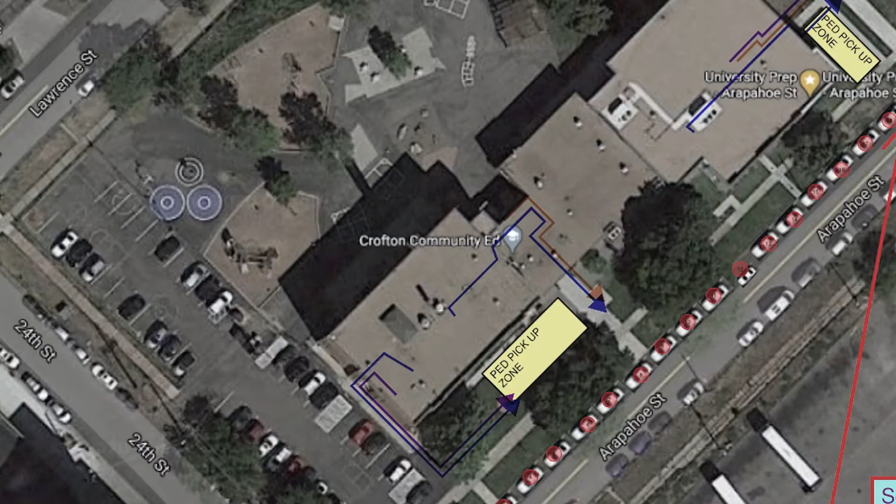I, along with my colleagues John and Adam, participated in an Autodesk four-part webinar series designed for safety following COVID-19. Session 3, Analysis Focus. In this video, we will cover how we became involved with a local school in trying to help them reopen, what kind of data they typically have available for us to use, what tools we use to evaluate classroom capacity and COVID-19 safe routing, and how we analyzed our design results with Autodesk Infraworks Mobility Simulations. Enjoy.

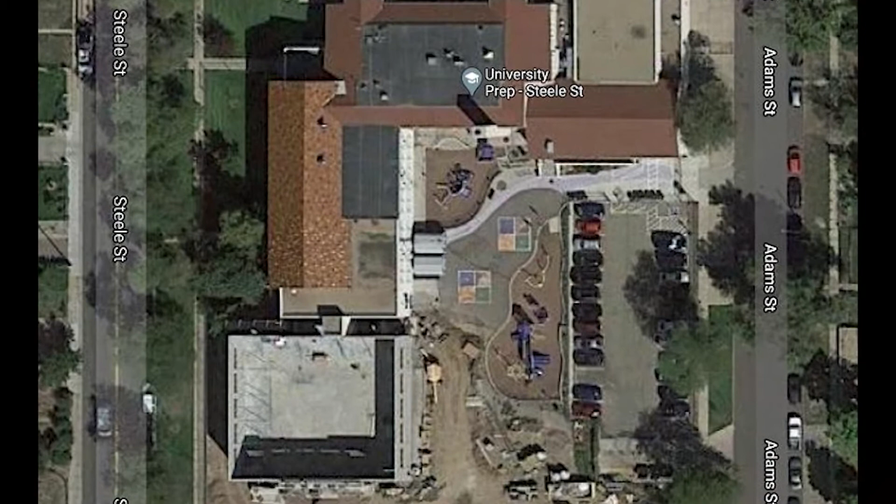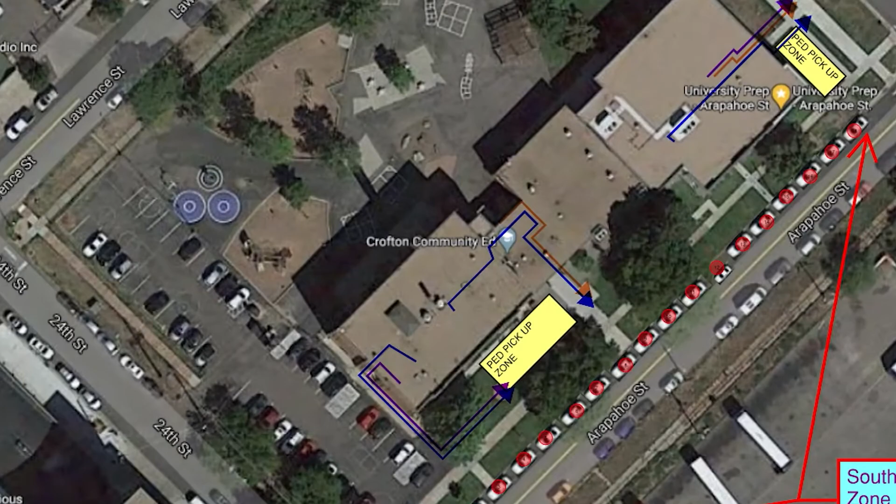VAplus got involved with UPrep out of need, based upon the fact that I'm a parent of a scholar at this elementary school. I quickly recognized that if we eventually went to in-person learning with COVID, social distancing and all the other things in the news being handled, it was going to make dismissals very difficult and seemed like it was going to be a logistic nightmare. So I reached out while getting supplies for virtual online learning for my son.

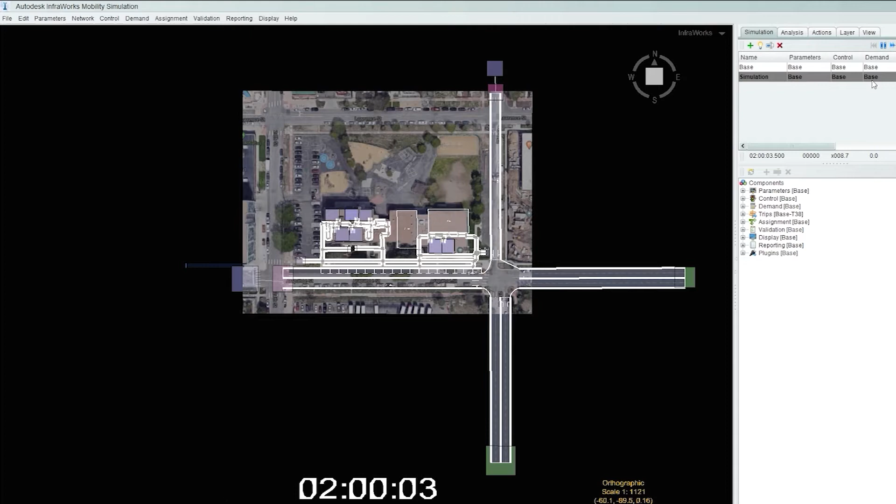I reached out to Alistair, the chief operating officer at UPrep, and requested a meeting with him to go through some of the stuff we thought we'd be able to do. We had just been introduced to InfraWorks and Mobility Simulation, and it felt like it would be a great way to take some of our other COVID social distancing tools that we had developed and prove and demonstrate that the solutions were workable, and fine-tune stuff without experimenting on students.

We quickly ran into some interesting challenges to overcome. A few of them being that there were a bunch of different transportation modes to take on. They have buses with a very limited window. They had pedestrian pickups, and they also had car pickups. And at the Steele Street campus, they had an additional one beyond the Arapahoe campus. They have students that are released and just walk home. So we've got a bunch of different modes to take care of.

They also have limited staff to watch kids in class as well as watch for parents coming up to pick up their kids, so they have to walkie-talkie communicate back and forth. They couldn't have too many points of entry or dismissal because they wouldn't have enough staff to cover that. And also just being able to maintain cohort separations. In Colorado, they're doing cohorts where in elementary schools, they're essentially not mixing these small groups of students to be able to contain outbreaks and things like that.

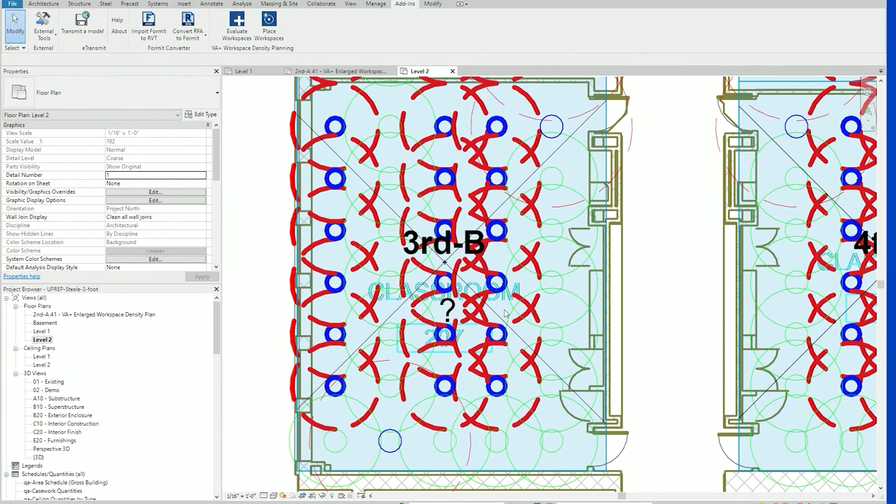So those were all things we started to deal with and started to use the mobility simulations to prove what we had essentially done—taken PDFs and CAD files, since each campus had a different piece of that, and put them into Revit, used our COVID planning tool to do some spacing. In one case we did a manual operation where we were able to pull in and lay out some classrooms. We've also taken advantage of generative design tools to give them more options, understanding where the display or chalkboard wall is versus student circulation and teacher circulation amongst all that as well.

The response has been pretty amazing as far as them being able to see how things are working. I think it gives them quite a bit more confidence that they can focus on the little details to make sure this is implemented safely, and see problems they probably wouldn't be able to see if I just showed them sketches or plans of the routing and things like that. Being able to show, hey, here's how you need to lay out your classroom is quite helpful, and also how you need to operate your one-way routing to keep cohorts from mixing.

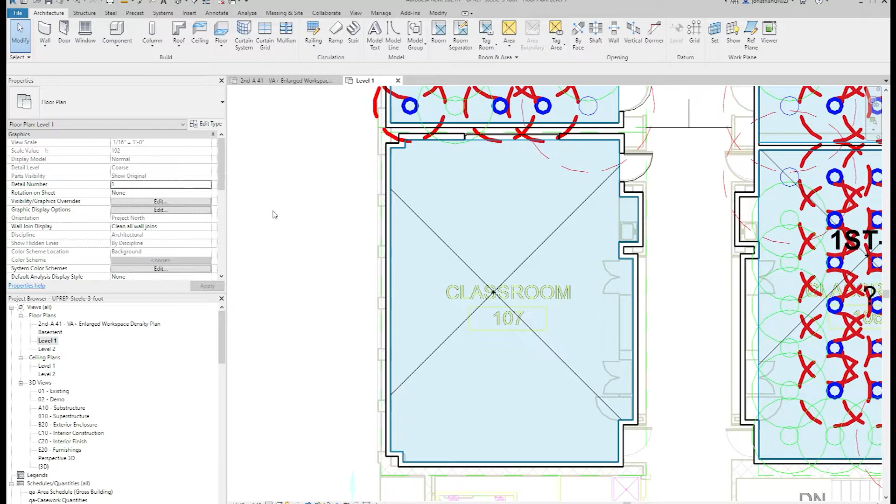Our workflow utilizes the generative design tool in Revit to create new classroom layouts. For this classroom, we will be generating a layout of student desks using a modification of the workspace layout script that comes with Revit's generative design tool. This allows us to explore configurations and find the upper limit of how many student desks can exist in the room while complying with social distancing guidelines.

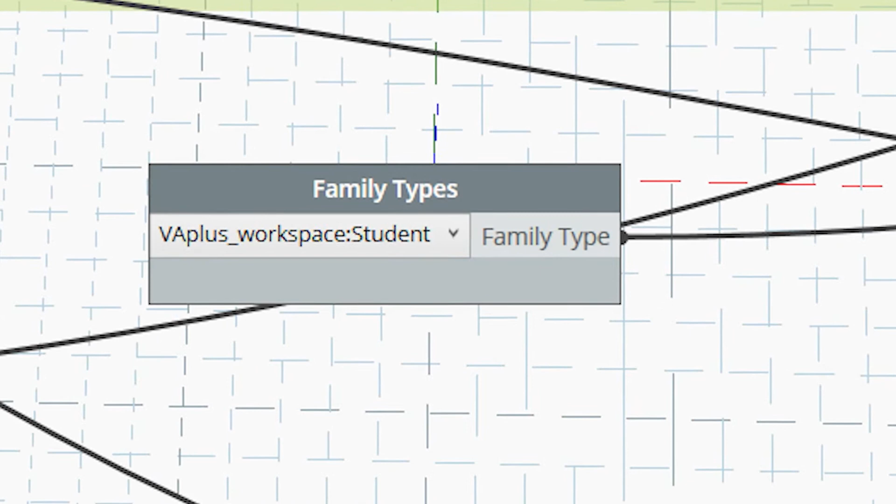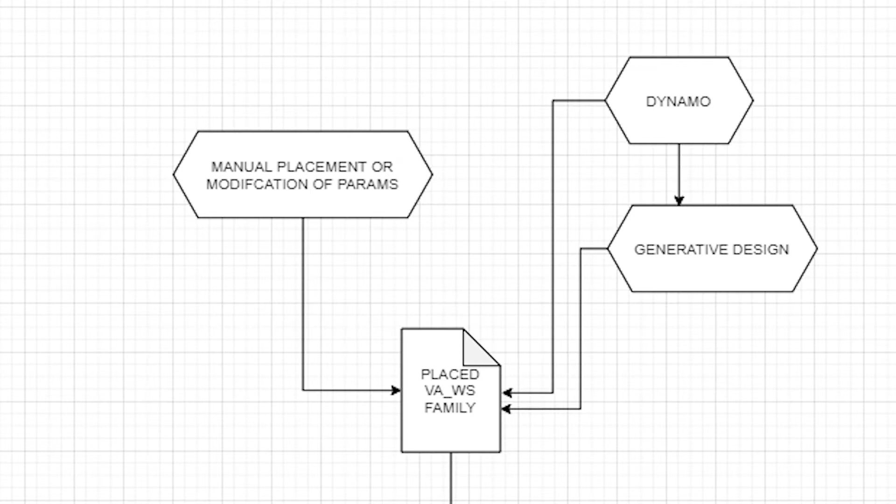We have modified the generative design script to also place our workspace family in addition to station furniture. These workspace families represent an occupancy point, common across our workflow, which allows both generative and manual placement to have identically accessible, machine-readable results that are managed and reportable through our Workspace Density Planning Tool add-in. This also makes the data available for tools outside of Revit in the form of plain text files. In this project's case, the guidelines specify a radius of 3 feet for students and 6 feet for instructors.

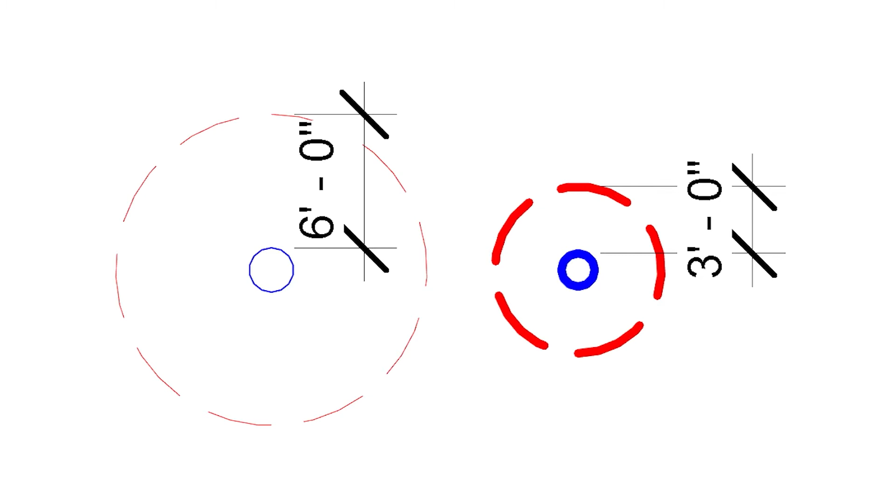The social radius and inner human radius of workspace families can be adjusted in the family type, and multiple types can be used to represent different kinds of occupant stations, or to represent circulation nodes.

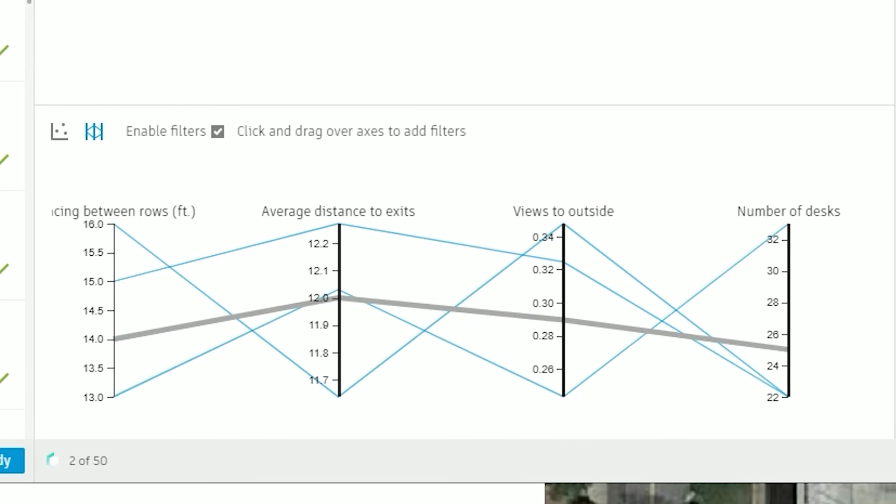Next, we generate layouts in the Revit Generative Design tool. Then select a desirable layout, and Generative Design places our workspace families in the model. A 6-foot radius workspace type is also manually placed to represent the occupancy point for the instructor.

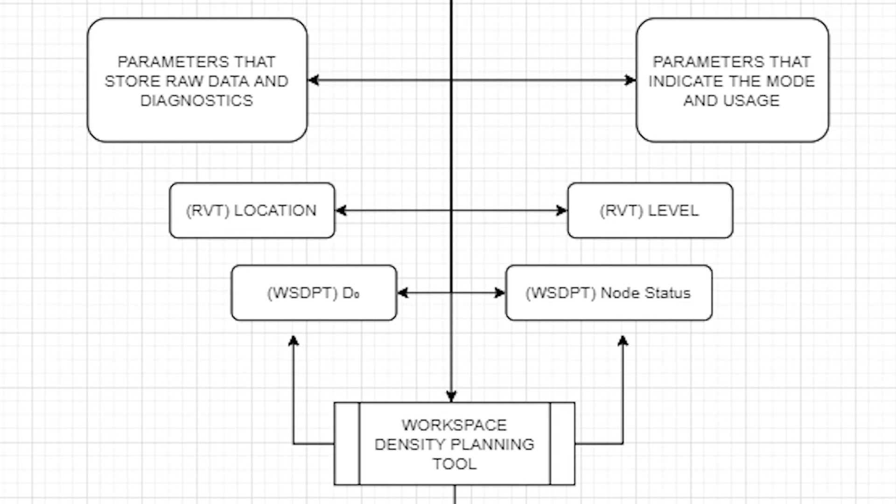But in order to represent the higher mobility of this role, which must have access to the student workspaces, we will also place circulation nodes, which can be created as a type in the same workspace family by enabling the circulation parameter. This can signal to other tools, such as the Workspace Density Planning tool, other add-ins, or Dynamo scripts, that the instances of this type are to be evaluated as a passage with revolving occupancy which does not count towards occupancy totals of a room.

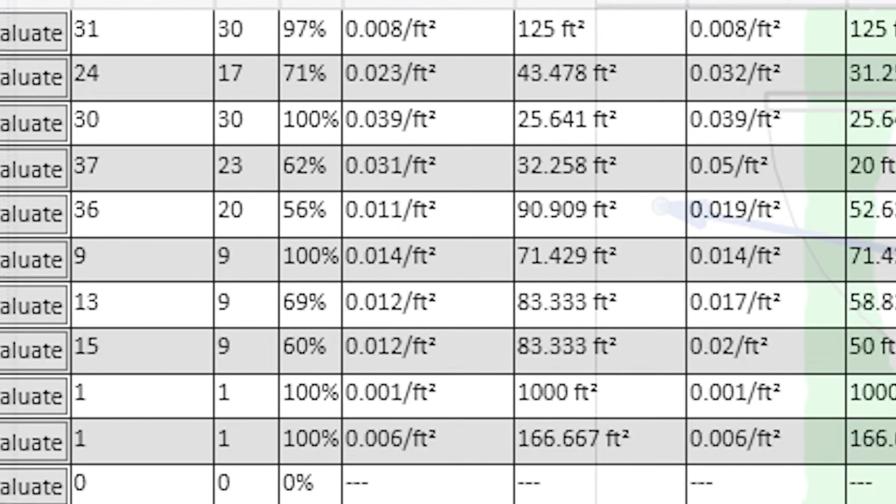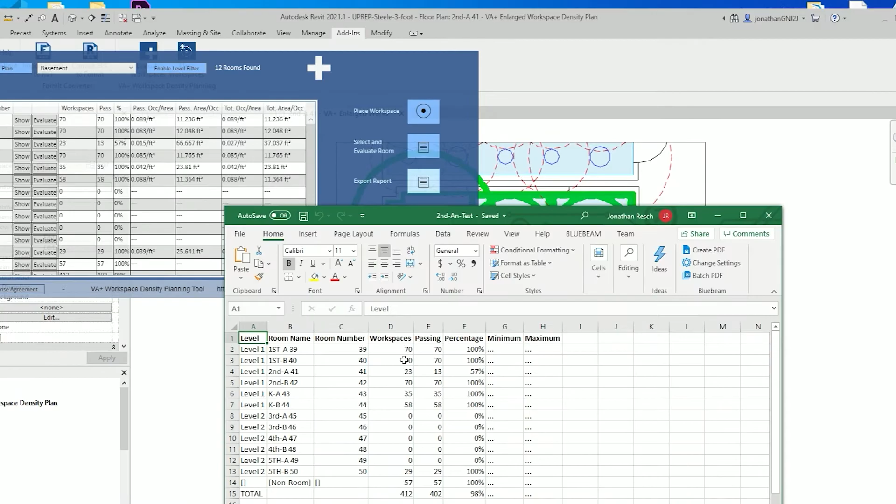Circulation nodes are placed in the aisles created by the Generative Design scripts layout, and we run the Workspace Density Planning tool to create a report. This process is performed for all the classrooms at the school. The passing workspace family instances will inform the final occupant counts for each classroom that are used downstream in Infraworks Mobility Simulation in order to create a mobility study.

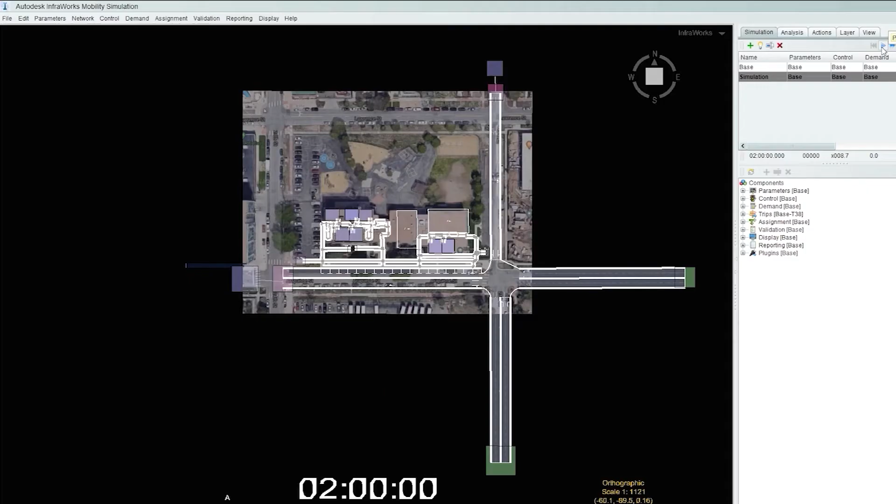Mobility Simulator in Autodesk's Infraworks was the perfect tool for us to use to validate our proposal. We were able to simulate our specific dismissal proposal and see if it met our client's goals and COVID-19 guidelines. The tool has enabled our clients to really visualize the dismissal plan and promote a more informed conversation leading to the best solution path. Benefits of using Mobility Simulator include showing how long dismissal and arrival will take, showing the length of each student trip, showing if social distancing is being met, and representing traffic density at the pickup zone.

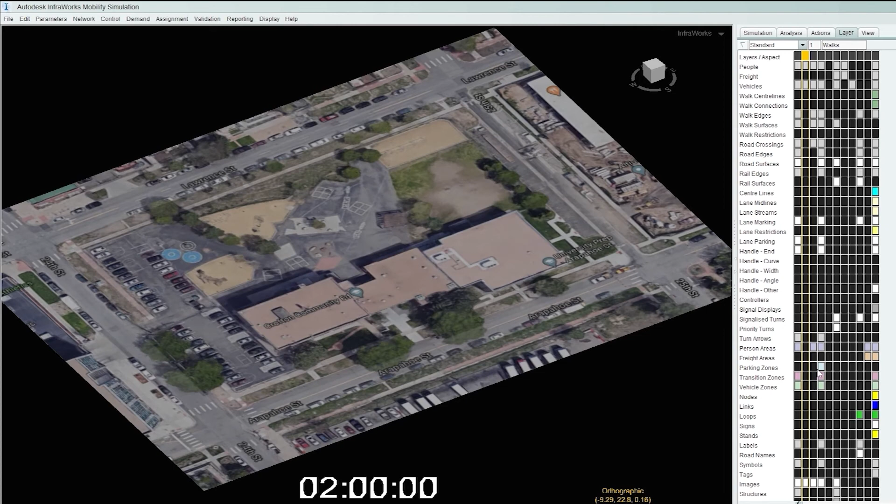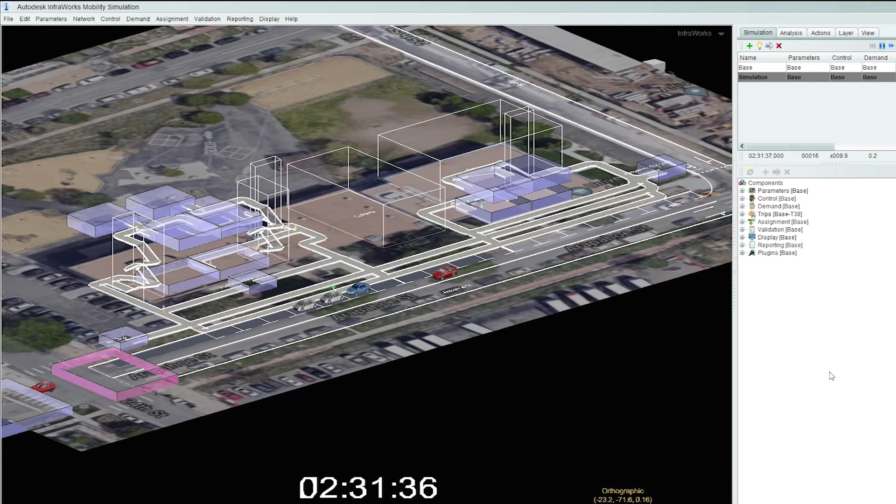Using the dismissal plan PDF outline, a network is created in Mobility Simulator to simulate the dismissal sequence. Classrooms are represented by areas as well as the bus stop and pedestrian pickup zones. This allows us to route students from all classrooms to the bus stop, the pedestrian pickup zones, as well as to the vehicle pickup zone based on real data provided by the school district.

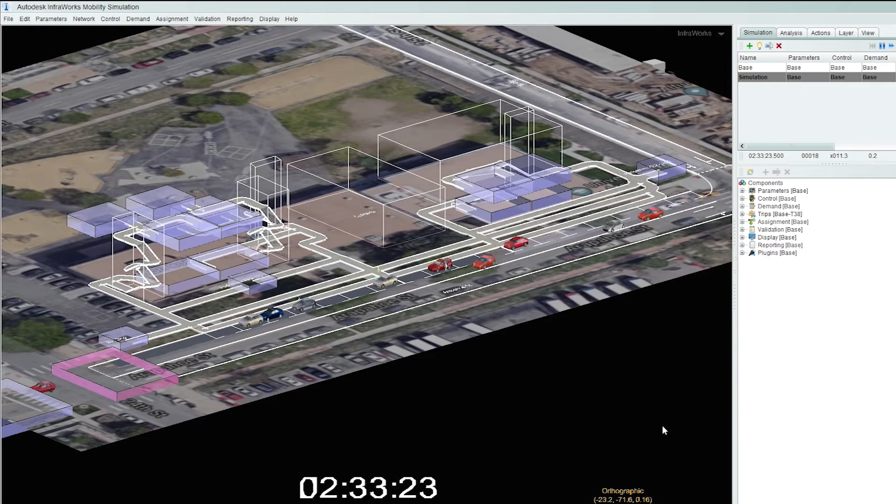Social distancing is simulated by increasing the space parameter for people to the desired social distancing radius, as well as by adjusting the capacity of walkways to equal the length of the walkway divided by the social distance radius.

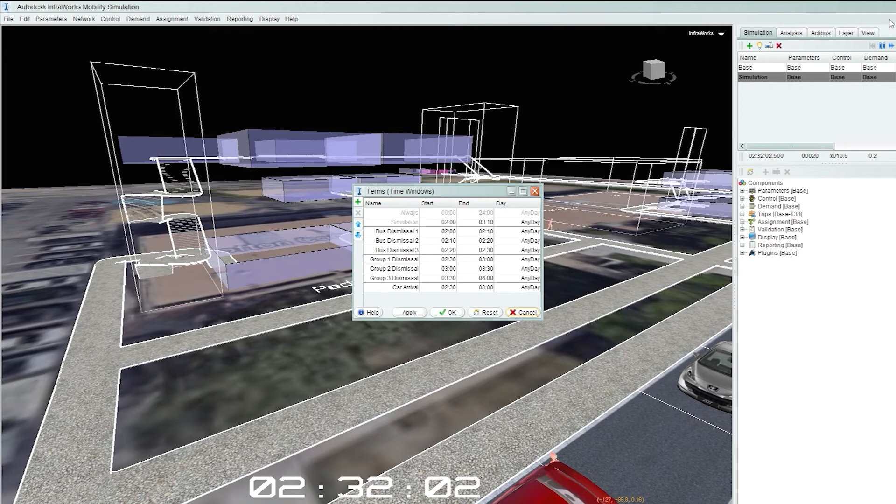We wanted to show the bus dismissal taking place before the rest of the students' dismissal to reduce the corridor load, so we set up some additional terms and demand profiles allowing us to stagger the dismissal of groups of students.

Many school layouts will lead to conditions where there are multiple routes which connect destinations. This can be helpful in simulating typical situations where people will randomly make choices, but for our purposes, we want all of the students to follow their dedicated paths, helping avoid collisions.

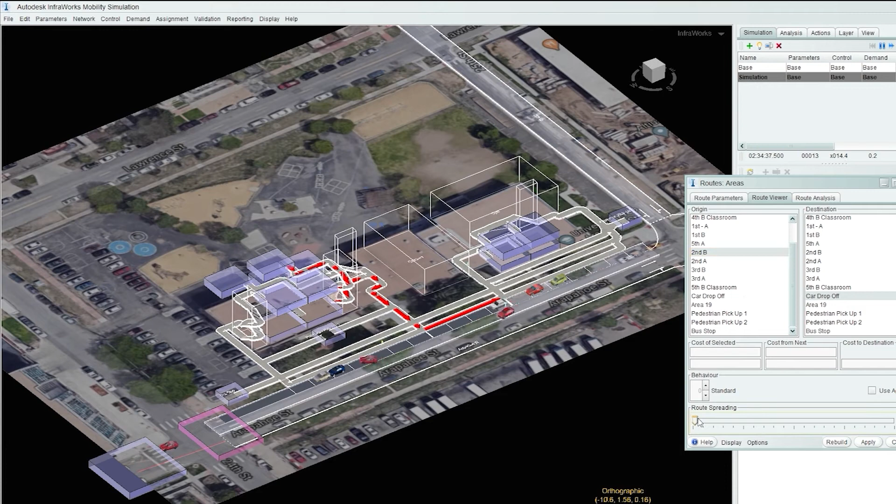We utilized the route spreading tool to eliminate deviation from the main paths. This tool is also used to test the network and make sure routes are connected and functioning as planned.

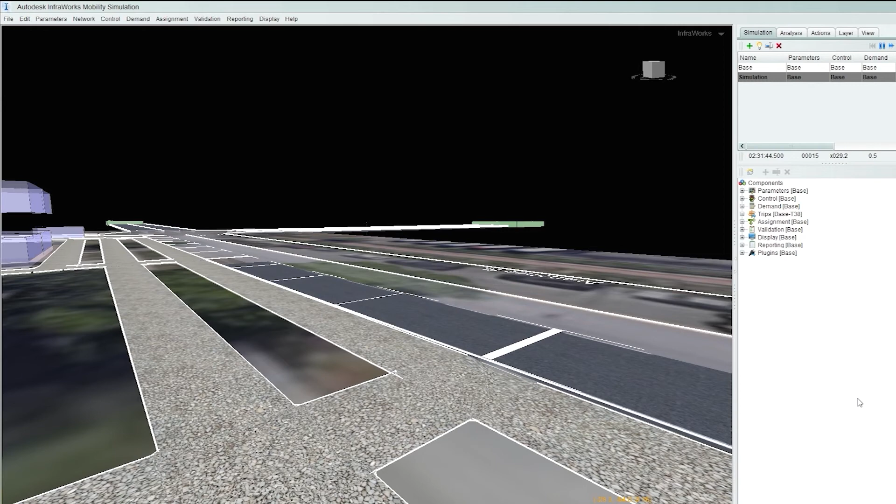We wanted to use the simulation to show the potential impact our plan would have on the vehicle queue for pickup, so we incorporated the vehicle pickup into our simulation. We have a group of cars assigned to fill up the pickup lot over the simulation time.

As students arrive in the pickup lot, they will get into a waiting car and leave. We increased the time for the students to get in the car to help simulate additional time that the cars will be waiting in the parking stalls.

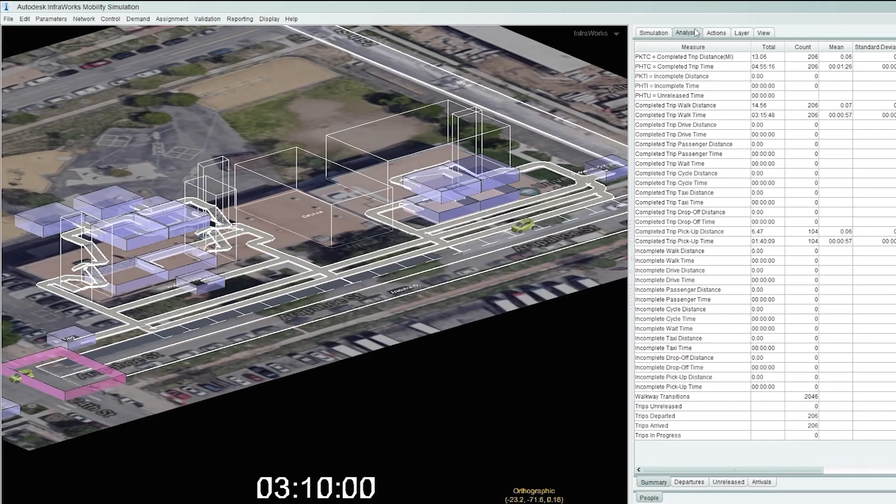To evaluate the simulation, we utilized the information shown in the Analysis tab, which gives a summary of trips with times and distances. We then reviewed the walking reports, which show individual trip times and distances, and the level of service, which shows if the spacing is being met on all walkways.

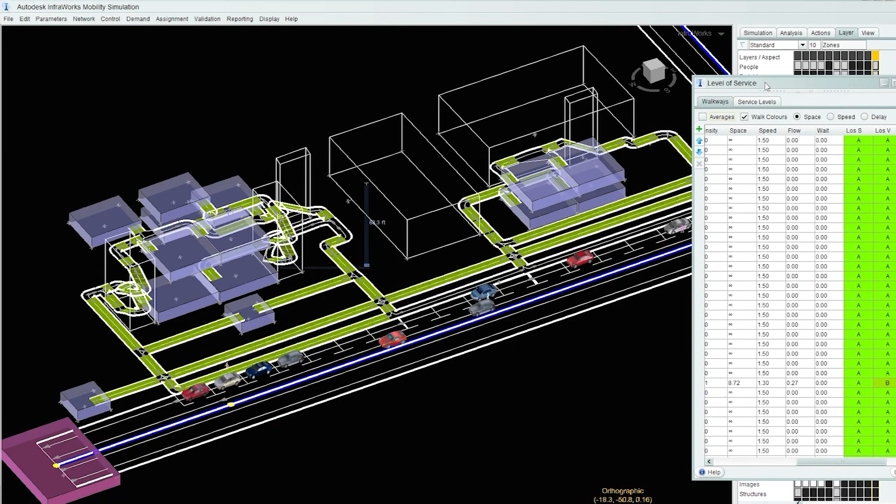These tools can show that the client's goals are being met and their concerns addressed regarding the time for dismissal and the ability to enforce social distancing.

Mobility Simulation can be used to solve a range of problems related to getting students safely back to school, from arrival sequences and class transition sequences to simulations for middle and high schools, as well as parking and class transition simulations at universities.